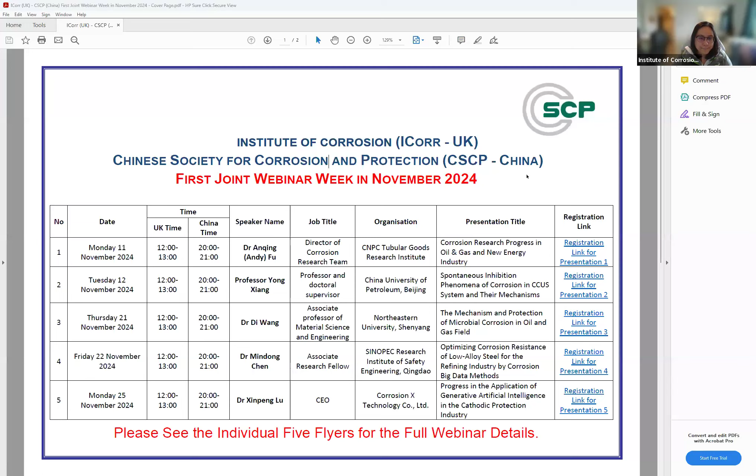Dear President Stephen, Dr. Gao, ladies and gentlemen, good afternoon and good evening. I'm Xiaogang Li from University of Science and Technology Beijing. Thank you for your attention at this meeting.

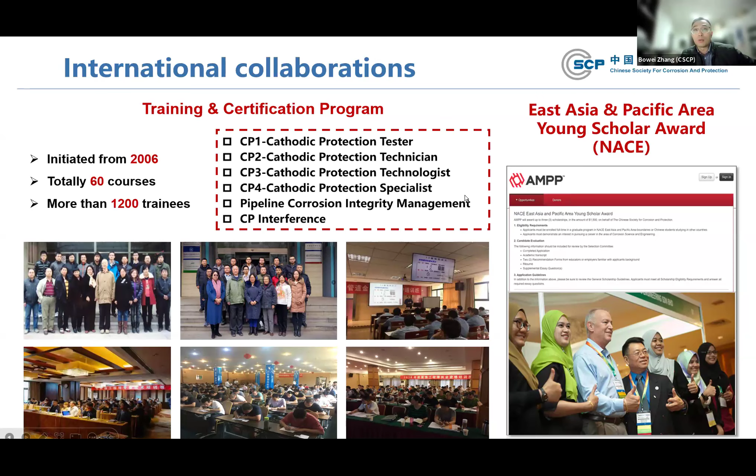During the past 3 consecutive years, we have held 3 different international conferences: the International Congress on Materials Degradation and Protection in 2022, the 19th Asian Pacific Corrosion Control Conference in 2023, and the 22nd International Corrosion Congress in 2024. During the 22nd ICC, there were more than 1,020 participants from over 40 countries, and it was really a great success. It was just held last month in Xi'an, China.

Okay, that's for the brief introduction of CSCP. For more information about us, you can refer to the official website or the official WeChat account. Thank you for your attention.

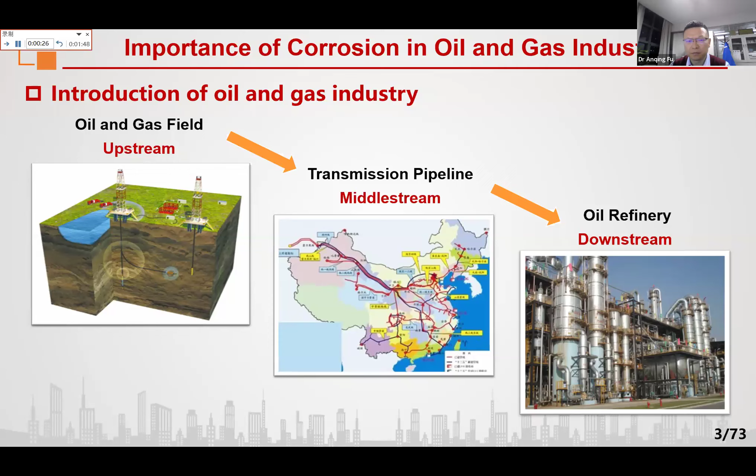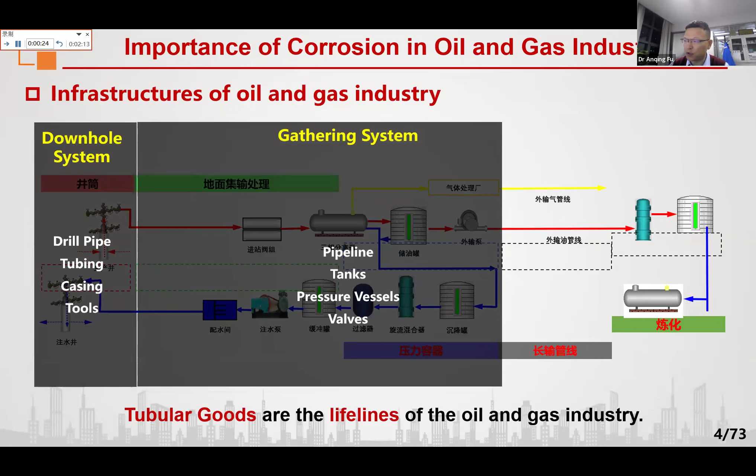Tubular goods are the lifelines of the oil and gas industry. The tubular goods include the drill pipe, tubing, casing, tools, and in the downhole system, as well as in the gathering system, we can see the pipeline tanks, pressure vessels, and valves. Also in the long transmission pipeline system, as well as the oil refinery system.

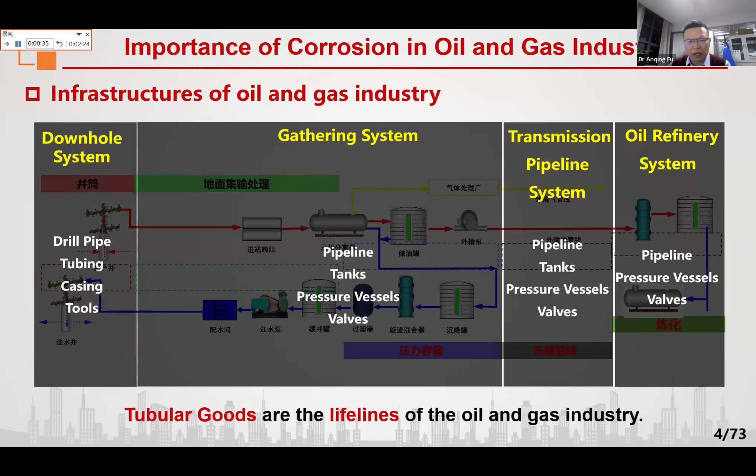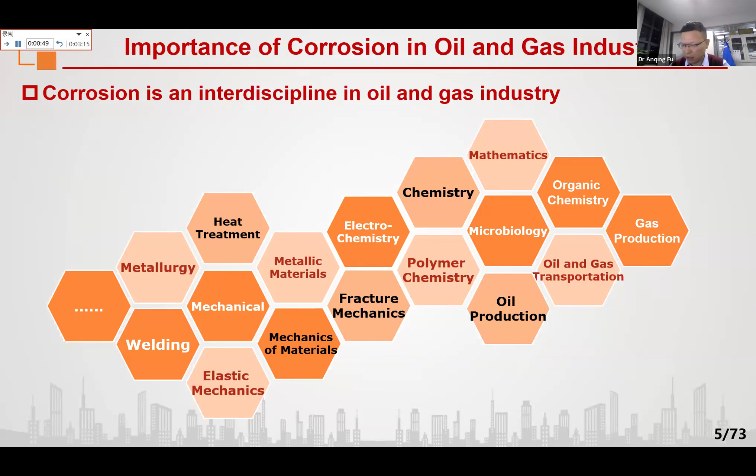Here we can see corrosion is an interdiscipline in the oil and gas industry. Besides the core majors like electrochemistry and material science or metallic material science, many other areas are also involved in this diagram I show. For example, for AI and CFD, we need to include computer science. Also, in the oil and gas field, we need to learn more about the oil and gas production process. For SCC, we need to involve mechanics and fracture and so on. All the corrosion forms shown in this slide, we can find in our oil and gas field. I will show you later.

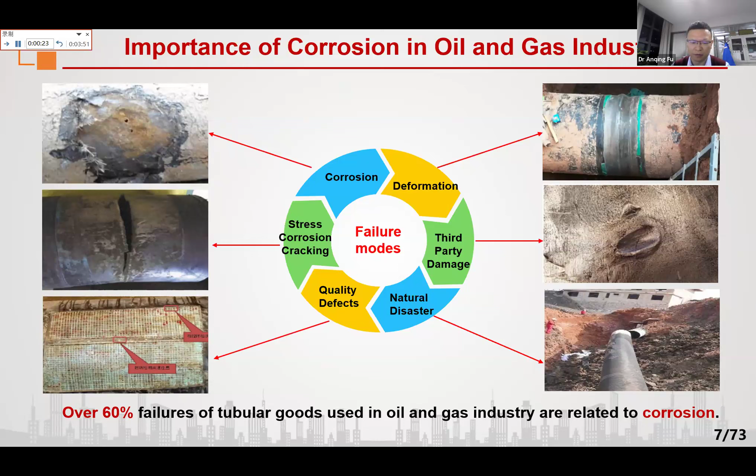It is reported that over 60% of failures of tubular goods or OCTG used in the oil and gas industry are related to corrosion. Especially for gathering pipelines in China, it is reported that almost over 90% of failures are related to corrosion. Cost of corrosion is more than the loss of oil and gas. I think we should be concerned more about the safety and environmental issues.

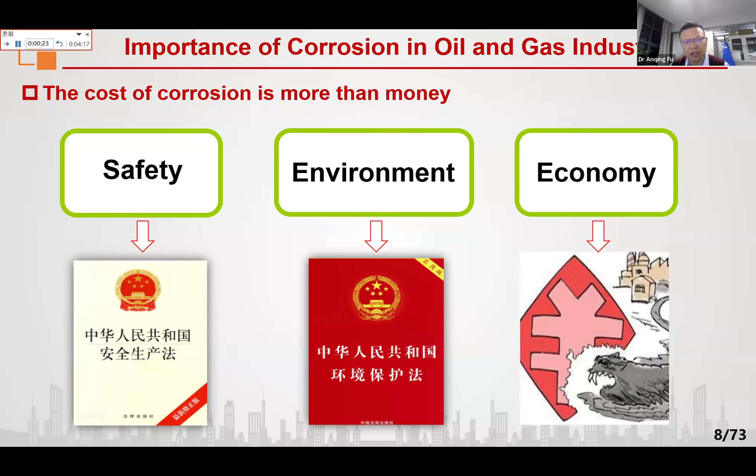So here I just summarize 3 things related to corrosion in the oil and gas industry. The first priority should be safety and environment, and the last one is the economy.

Okay, let's go to the second section, the corrosion case studies in the conventional oil and gas field. Here I just want to differentiate from the following shale gas, so here I use the term conventional oil and gas.

This slide shows the typical corrosion failures of the downhole tubing and gathering pipeline. As I mentioned earlier, various corrosion types can be found in the oil and gas field. Here I just want to emphasize that all the pictures shown in this slide are collected from the field or our project, instead of online or from literature.

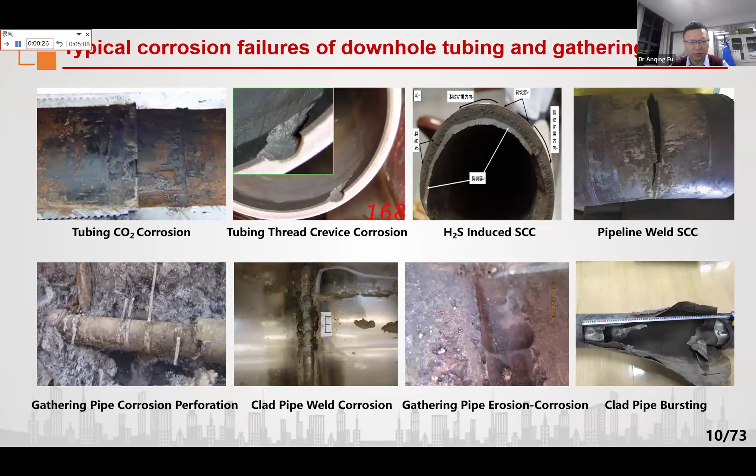The first case is for the downhole system.

Acid fracturing is widely used for enhanced oil and gas recovery, but it can cause severe corrosion to tubing as well as casing. Since the acid solution is very acidic, it causes very severe corrosion within several hours or several days. So several research efforts are underway in our team: new tubing material selection, acid inhibitor research and development, as well as corrosion evaluation facility development.

The last point is a standard for conducting the test. Since this test is very unique, we need to develop a new standard or method to do this kind of test.

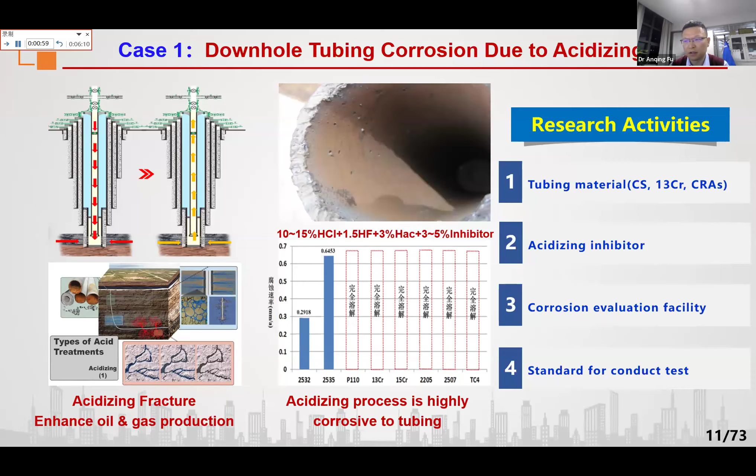The second case is the most concerning failure in the oil and gas field, especially in high sulfur oil and gas fields. In China, especially in the Sichuan basin, we have a lot of gas fields that contain very high sulfur, so SCC is absolutely the first priority we need to consider.

In the future, we need to develop anti-SCC materials and optimize the OCTG manufacturing process, as well as develop some new chemicals to reduce SCC.

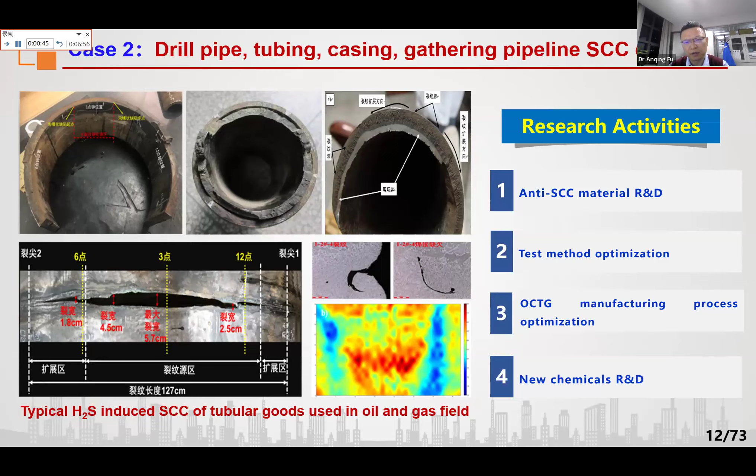The third case is downhole tubing SCC due to packer fluid. This is another type of SCC.

No matter in China, European countries, or North America, we usually use three types of packer fluid. The first one is halide salt. The second one is formate. The last one, especially used in China, is phosphate.

We already found that a lot of 13-chromium martensitic stainless steel tubing has experienced severe SCC in phosphate packer fluid. We have found many cases in the field, and we've also done a lot of tests in our lab. We indeed found SCC occurred for the 13-chromium stainless steel.

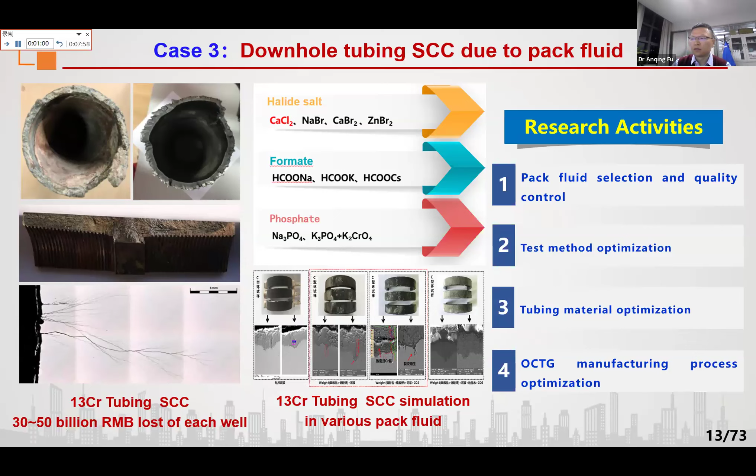The fourth case is tubing and gathering pipeline erosion corrosion. No matter in the downhole system or the gathering system, erosion corrosion is always a big issue. Here I give the most commonly used methods in our oil and gas industry to conduct erosion corrosion tests. The first one is rotating disc electrode.

For this one, we cannot apply high temperature or high pressure. It's mainly good for theoretical research. The second one is impinging jet - the same thing, it cannot apply pressure and temperature. The third one is the fluid loop.

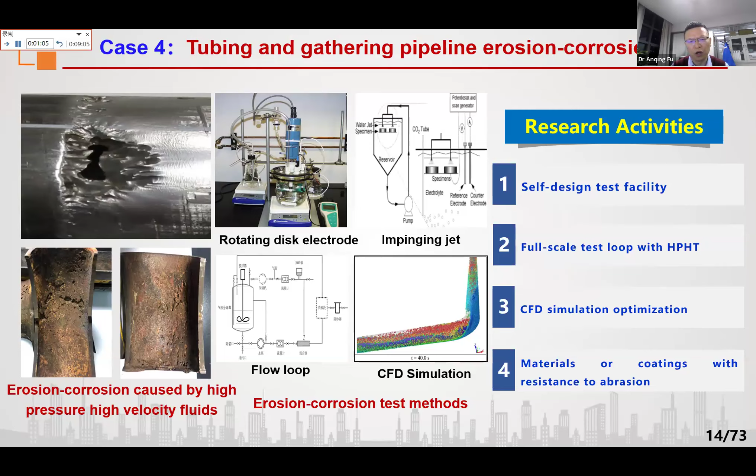Somehow the fluid loop can apply some pressure and temperature. The last one is CFD simulation. So currently, lab testing with high flow rate under high temperature and high pressure conditions is still a big issue. There is no commercial or self-designed facility to do this kind of test right now.

The last case, which personally I think is the most common gathering pipeline corrosion, is defined as under deposit corrosion, short for UDC. Usually the localized corrosion occurs at the 4 to 8 o'clock position, especially at the 6 o'clock location.

Inhibitors and coatings, non-metallic composites, and clad pipes or lined pipes are widely used to reduce this kind of corrosion. Actually in China, there are many non-metallic composite pipes used in the oil and gas gathering pipeline system, especially in Changqing oil field, Daqing oil field, and many other oil fields.

Since this kind of material has no corrosion, there is still some degradation, especially when temperature is over 80 degrees C, which can cause a big issue.

Another disadvantage of the non-metallic pipe is that the connection joint is a big issue. Since we usually use many kinds of joints, there is a lot of leakage due to the material going inside.

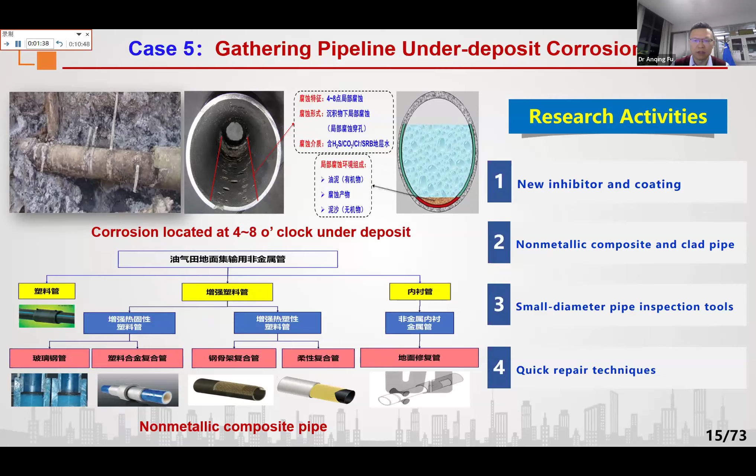So let's move to the third section, the corrosion case studies in the shale gas field. Here I mainly talk about microbiologically influenced corrosion, that means MIC.

Before we go to the details of MIC in shale gas oil field, gas field, I want to briefly introduce shale gas production. Hydraulic fracturing is frequently used in shale gas. Usually we use 10,000 tons of fracture fluid and 1,000 tons of sand to do the hydraulic fracturing, and this is only for one single well. You can imagine for many wells, we need a lot of fluid with sand.

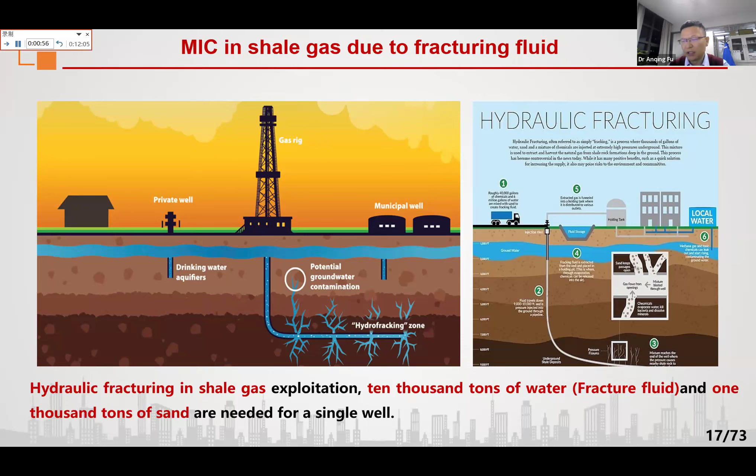Usually we repeatedly use one batch of the fluid. Due to this repeated use, a lot of bacteria can be generated. The first typical one is SRB, sulfate reducing bacteria, and also TGB, FB, and many others. But I think the main one contributing to the corrosion is the SRB.

The MIC frequently occurs no matter in the gathering system or in the downhole system. Here you can see the picture very clearly shows how the corrosion occurred in those two systems. The corrosion rate is prohibitively high no matter in these two systems.

Here is an example: a 5 millimeter wall thick tubing was perforated within 58 days, just less than 2 months. There was a lot of perforation, and the corrosion rate is very high. Actually, we found this not just in a single well, but many cases in CNPC and Sinopec shale gas wells.

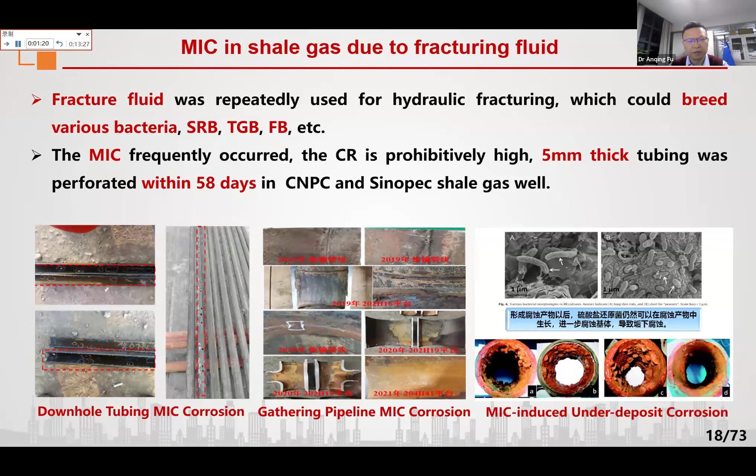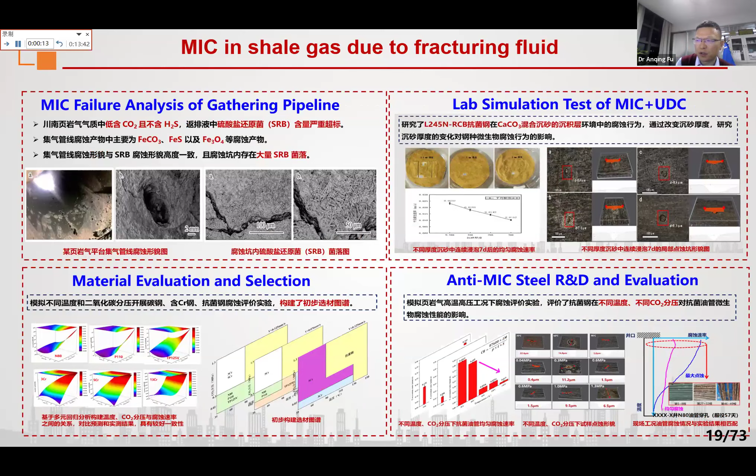Our team has done a lot of failure analysis and lab simulation of MIC, material evaluation and selection, as well as anti-MIC steel development. Currently our TGRI has set up an MIC lab, which is capable of conducting SRB, FB, TGB culture and isolation and analysis, as well as MIC tests under various conditions.

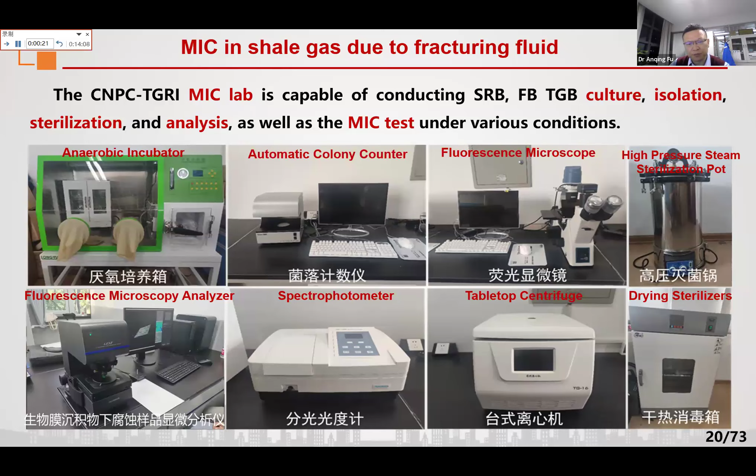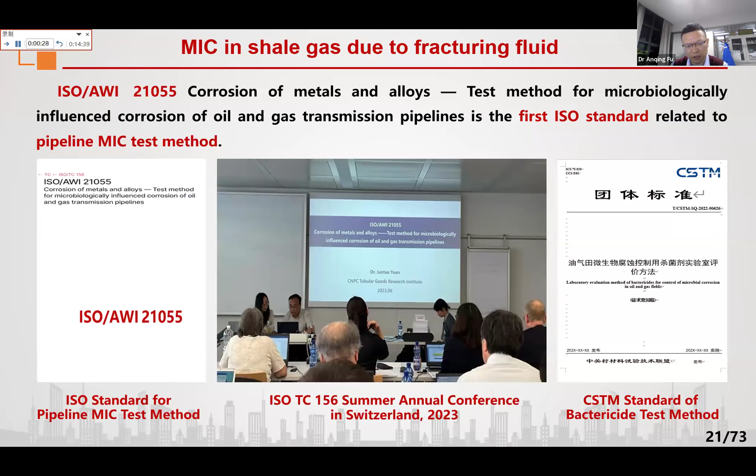Based on almost 5 years of research, our team proposed an ISO standard, the test method for MIC of oil and gas transmission pipelines. This is the first ISO standard related to the pipeline MIC test method. Besides this ISO standard, we also developed several MIC related standards, for example the test method as well as the anti-MIC materials.

The next part is the corrosion in CCUS or CCS CO2 oil displacement. Why do we care about CCUS in the oil and gas industry? Since it is a win-win strategy, the CO2 is reduced and the oil is enhanced. However, the CO2 has a side effect: corrosion. In our CNPC, corrosion is considered one of the 10 key techniques of CCUS EOR.

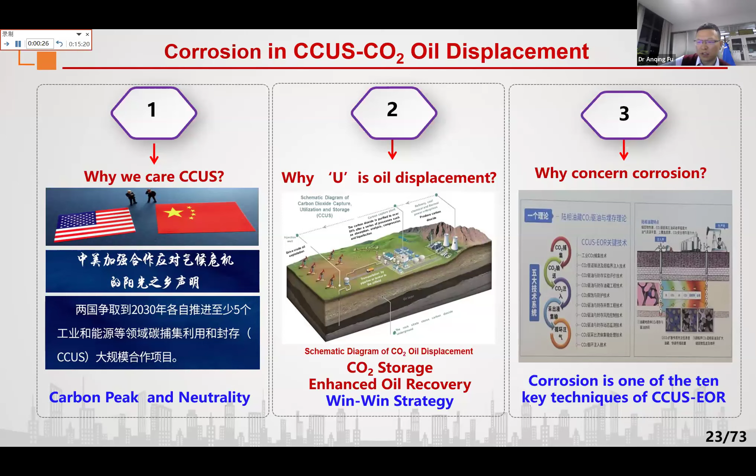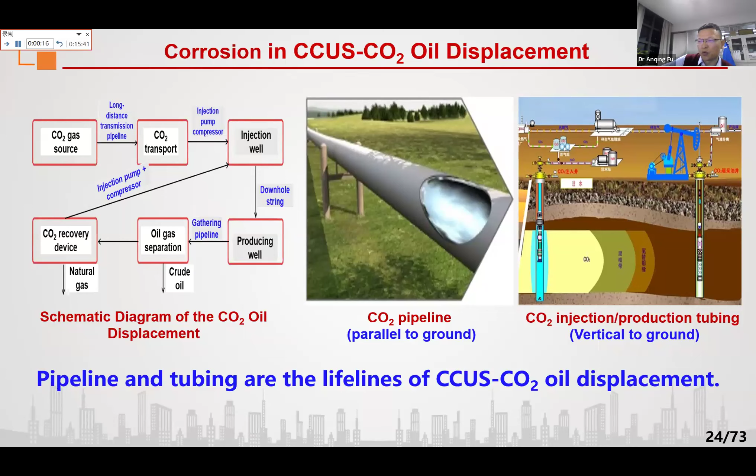No matter for CO2 injection and production or for transportation, we need tubular goods - that means pipelines, tubings, casings - which are the lifelines for the CCUS CO2 oil displacement. Here I just briefly compare the difference between conventional CO2 corrosion and CCUS CO2 corrosion.

The first one is most CO2 injection is in a supercritical state, which can induce tubing and casing corrosion. The second one is the injected CO2 contains acidic impurities, which can induce ICC, since this kind of gas source is mainly from coal-fired power plants. The third one is the supercritical CO2 injection leads to low temperature.

Actually, this kind of scenario we can find in our lab. If you pressurize the CO2 in our autoclave, you can see there is some ice. The temperature quickly goes down due to the CO2 injection. The last one is supercritical CO2 induced packer rubber failure.

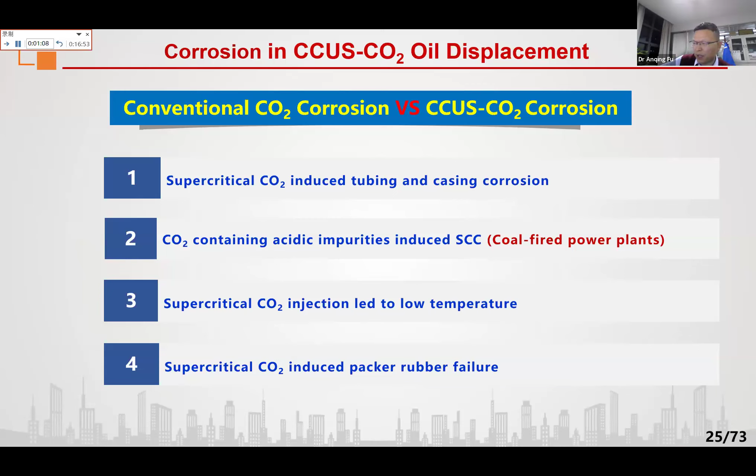Based on our research, supercritical CO2 with multi impurities can cause corrosion - that's the first one. The second one is SCC, as I mentioned earlier, stress corrosion cracking and scaling, since the supercritical CO2 with a lot of ions can lead to scaling. The third one is packer rubber sealing failure, and the last one is low temperature fracture.

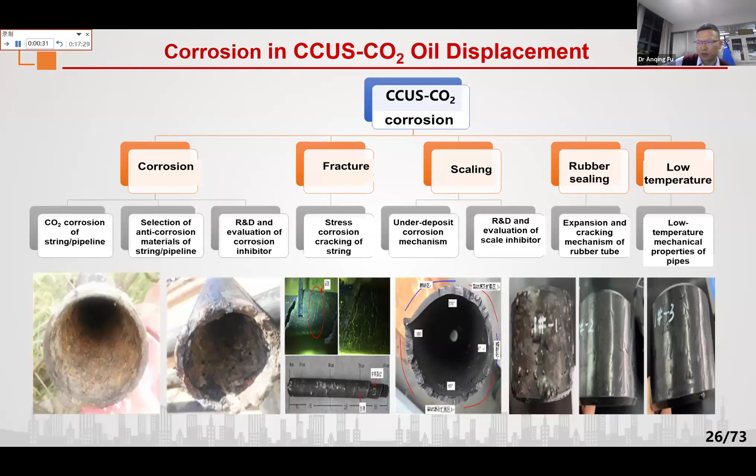In the following slides, I will show you the research results from our lab. The first one is the influence of CO2 pressure on the corrosion rate. The corrosion rate is substantially increased when the CO2 reaches the supercritical state.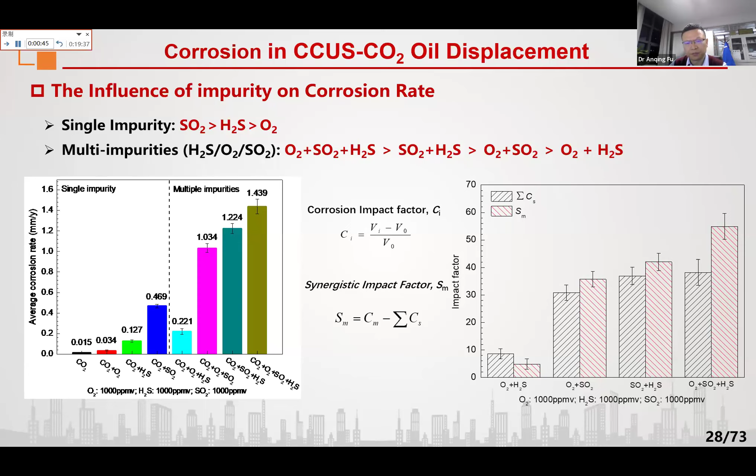Since we all know CO2 has no relation to SCC, stress corrosion cracking, there was few researches on SCC in lab research. However, acidic impurities, as I mentioned earlier, contained in the CO2 injection system, which can induce SCC failures. That's not only in one oil field, but in several oil fields, in CNPC and Sinopec, so it's not an individual case. It's very common, and we have done a lot of failure analysis for this kind of oil field. Therefore, more attention needs to be paid in the future for this kind of research.

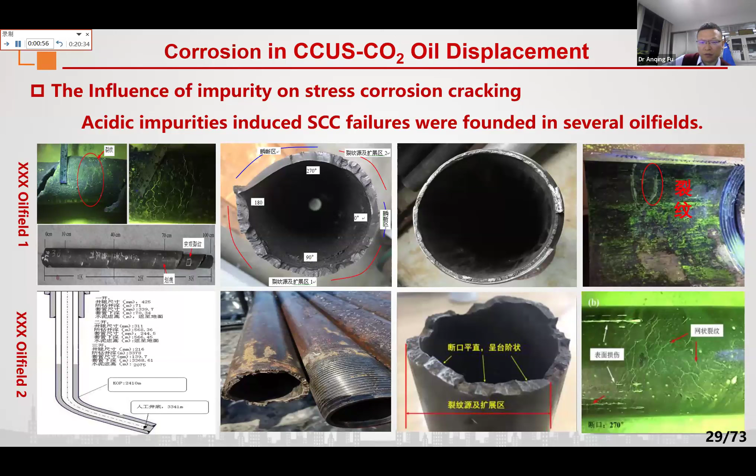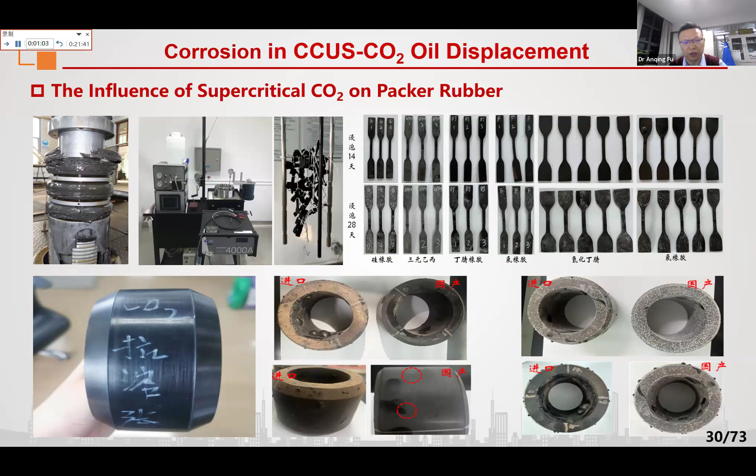Now we have done a lot of tests for this kind of material. Right now in China, some factories have developed a high performance rubber for this kind of situation, especially for the supercritical CO2 condition.

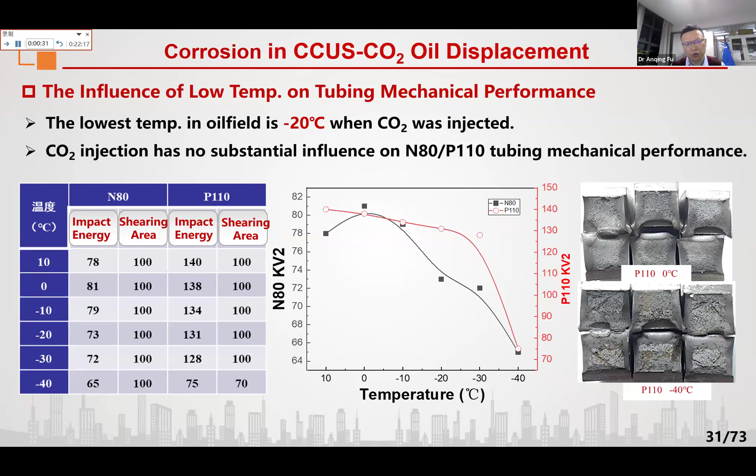The last one is the influence of low temperature on the tubing mechanical performance. Why do we concern ourselves with the low temperature situation? Since the injection of CO2 will lead to the temperature dropping to as low as -20 degrees C. Based on our research, CO2 injection indeed led to a decrease of the impact energy of the tubing. However, there was no substantial influence, so right now we don't concern too much about this kind of scenario.

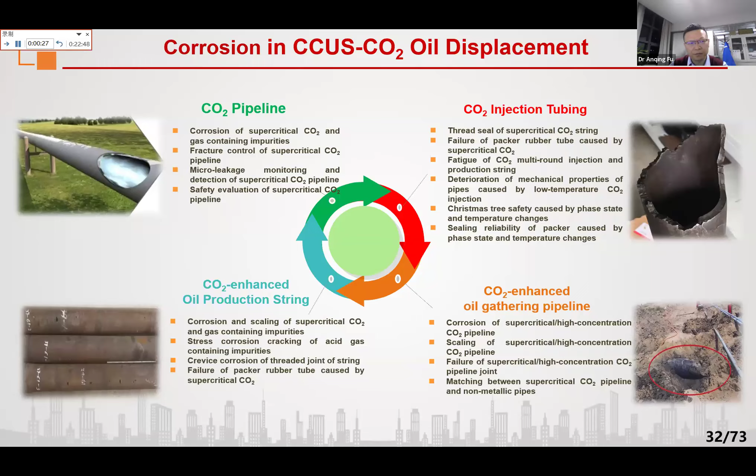Okay, the next part is hydrogen, which is another hot topic besides CCUS CO2 corrosion in China. As we know, hydrogen is considered an extremely clean energy. Many infrastructures, such as pipeline, tubing for underground hydrogen storage, liquefied hydrogen vessel, and solid hydrogen storage material, are potentially degraded or damaged by gaseous hydrogen.

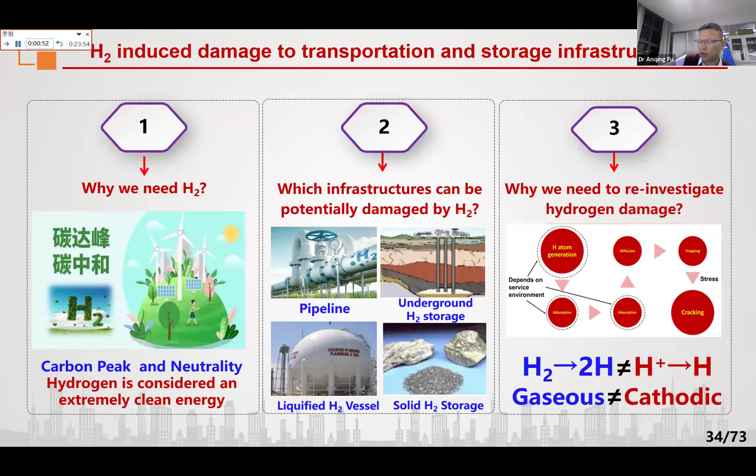Actually, there are a huge amount of publications on hydrogen-induced SCC, no matter in Chinese version or English version, we can find a huge amount of publications. However, those researches are based on cathodic or ionic hydrogen, which is totally a different story for gaseous hydrogen. My PhD supervisor, Dr. Frank Cheng from University of Calgary, has summarized the differences between gaseous hydrogen and cathodic hydrogen. I will not touch much detail due to time limitation.

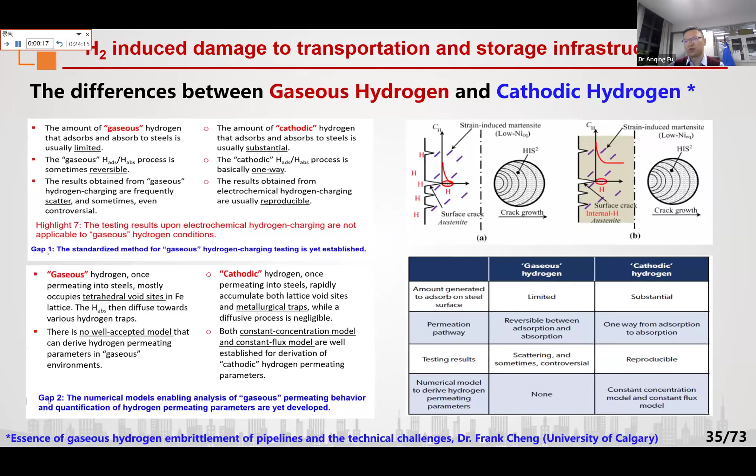In these slides, I compared the cathodic hydrogen test facilities and the gaseous hydrogen test facilities. You can see usually there is a very classic test method, the double D cell, to do the cathodic hydrogen damage test, or the SSRT with hydrogen charging, which is cathodic hydrogen charging.

Currently in our CNPC TGRI lab, we have already developed three facilities. The first one is high temperature, high pressure gaseous hydrogen SSRT test. The second one is the high temperature, high pressure gaseous hydrogen permeation test. And the last one is doing the hydrogen content test using HTDS, that is, the high definition thermal desorption spectrum method.

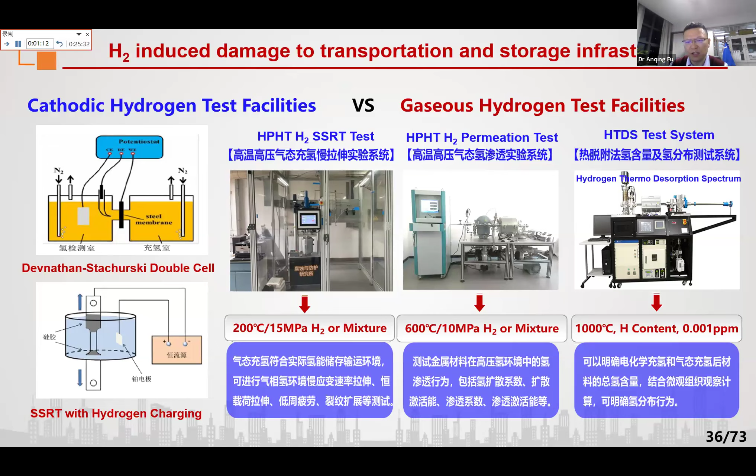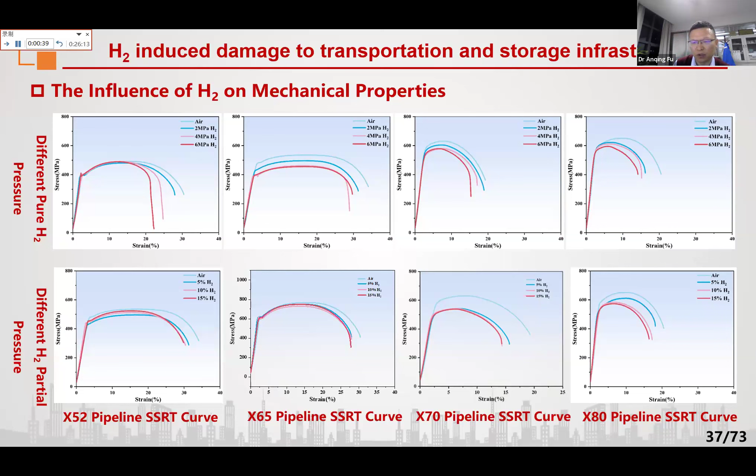We can see in this slide that gaseous hydrogen indeed has an influence on the mechanical properties of pipeline steel, no matter for the low-grade pipeline, X52, or the high-grade pipeline steel, X80. Actually, X80 was commercially used in China for a very important long transmission pipeline project, but as I know, this kind of high-grade pipeline was not commercially used in other countries.

We have also done the test for gaseous hydrogen permeation under high temperature, high pressure conditions, to find how much hydrogen went into the pipeline steel after the test in the gaseous hydrogen environment, which was quantified by the HTDS method. Actually, these three facilities are not only suitable for pipeline steel or tubing, but also for aluminum, titanium, stainless steels, as well as CRAs.

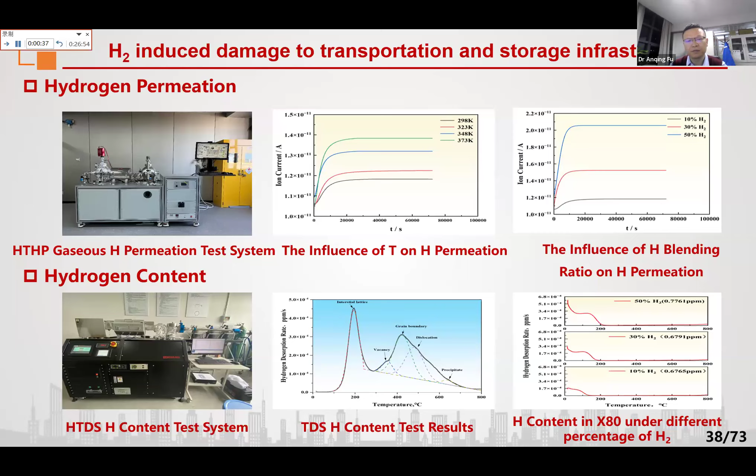Okay, the 6th section is the 3 anti-corrosion products developed by our CNPC TGRI corrosion research team. The first one is the inhibitors.

Before we go to the inhibitors, I want to share some problems we encountered in the oil and gas field. Inhibitors are the most commonly used corrosion protection technique in the oil and gas industry. Unlike theoretical research in our lab, the physical properties are as important as the inhibition efficiency and mechanism. Here are some typical examples of inhibitor physical property problems encountered in the oil field: foaming, stratification, poor compatibility with other additives such as MDEA used for oil and gas treatment solutions, and poor solubility in the water or oil phase. The last one is inhibitor type misuse.

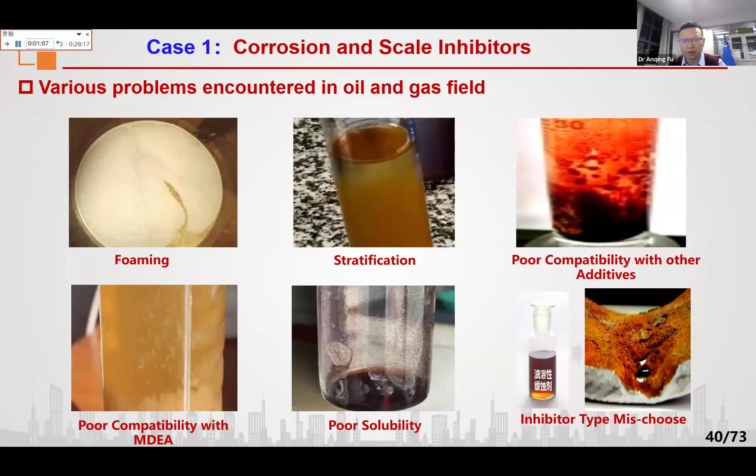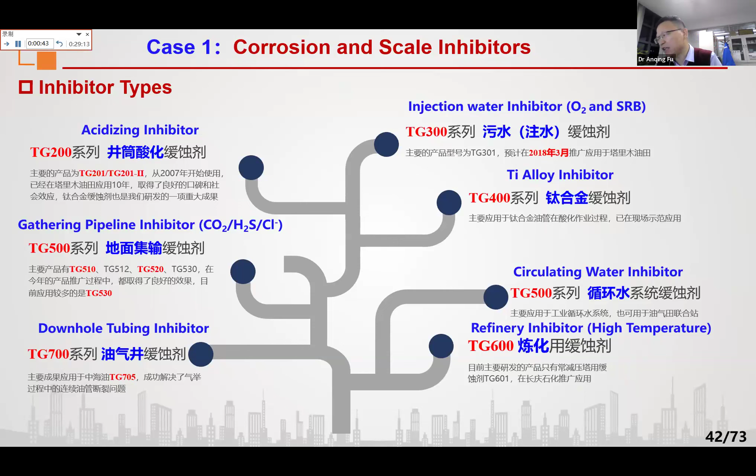Our team has developed various types of inhibitors, from downhole acidizing inhibitors to gathering pipeline inhibitors for CO2 and H2S. We also developed special inhibitors for oxygen, since we inject a lot of gas and some of it involves oxygen. Additionally, we developed injection water inhibitors, inhibitors for special alloys like titanium and duplex stainless steel, and high temperature inhibitors for refineries.

The inhibitors have been applied in over 400 oil and gas wells in Changqing, Tarim, and Qinghai oil fields, and over 5,000 kilometers of gathering pipelines. Corrosion in the downhole and ground gathering system was greatly reduced by the inhibitors we developed, especially in the Tarim oil field, which is the third biggest oil field in China.

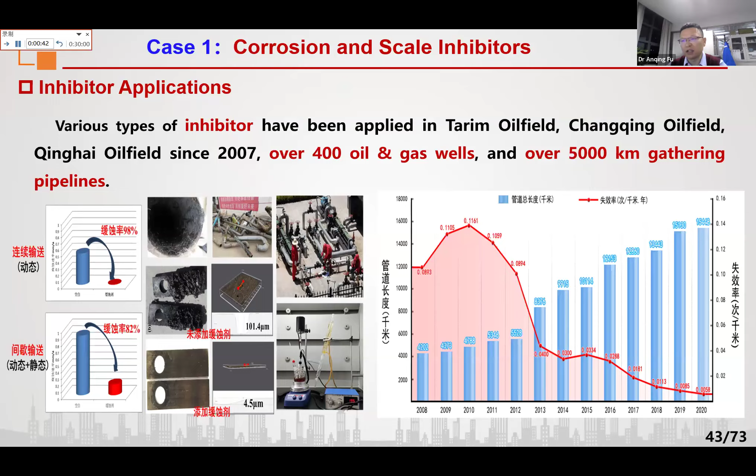Another technique is coating, especially organic epoxy coating, which is a popular anti-corrosion technology used in oil and gas fields in China. There are already many coatings applied in oil and gas fields. How to develop an overall high quality coating, I think, is still a big issue.

So here we developed this coating with two key factors. The first is room temperature curing, meaning energy saving—we don't need electrical heat to reach high temperature, just room temperature or a little higher, so there's a lot of energy saving. It's a kind of low carbon coating.

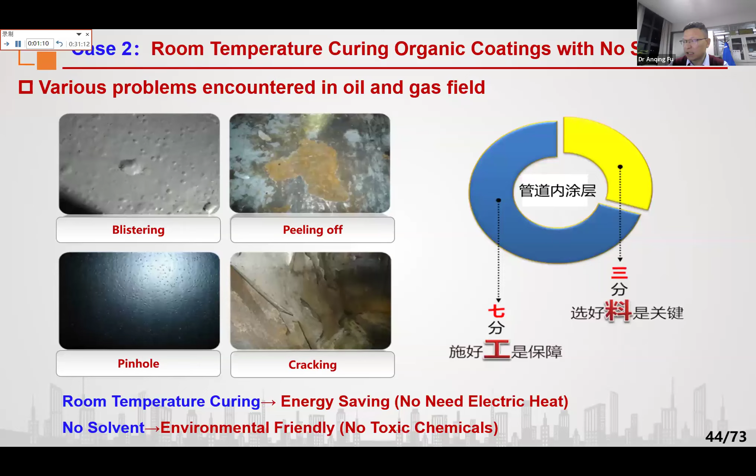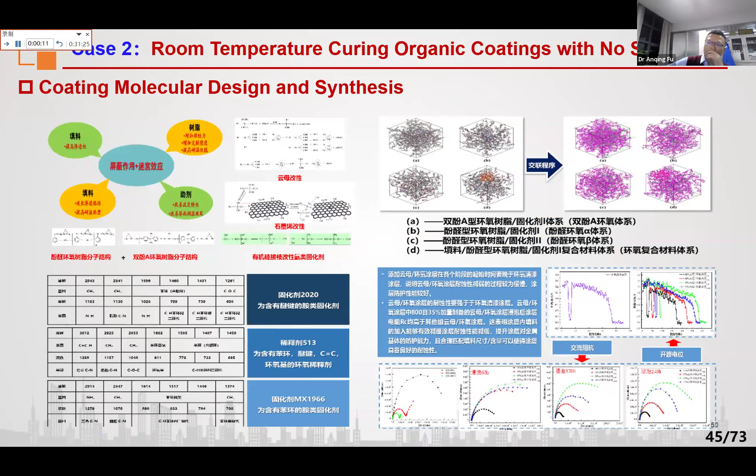The coating we developed can endure 35 megapascal CO2 and 2 megapascal H2S at temperatures as high as 130 degrees C.

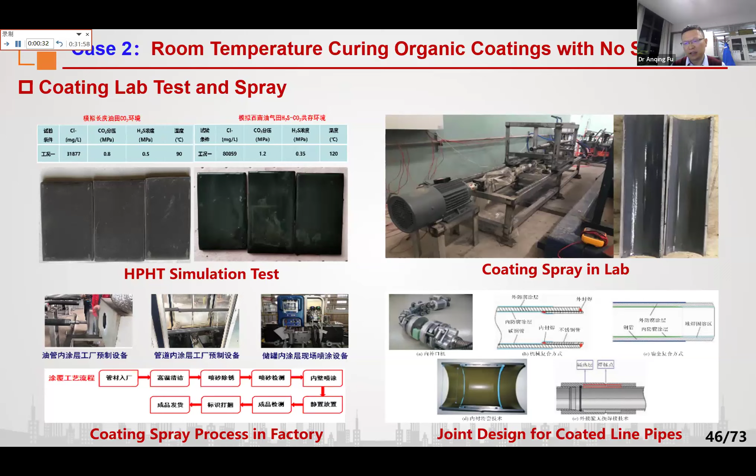Besides the paint itself, the spray process or technology, as well as the joint connection, are very important for coating application in the field, whether for tubing, casing, pipeline, tanks, or vessels. By now our team has already developed coatings for drilling pipes, downhole tubing and casing, gathering pipelines, as well as tanks and vessels. Some of these have undergone pilot tests in Changqing and Shengli oil fields.

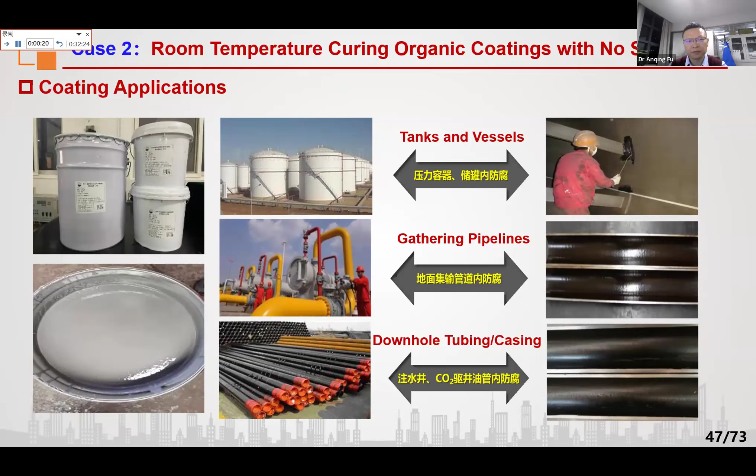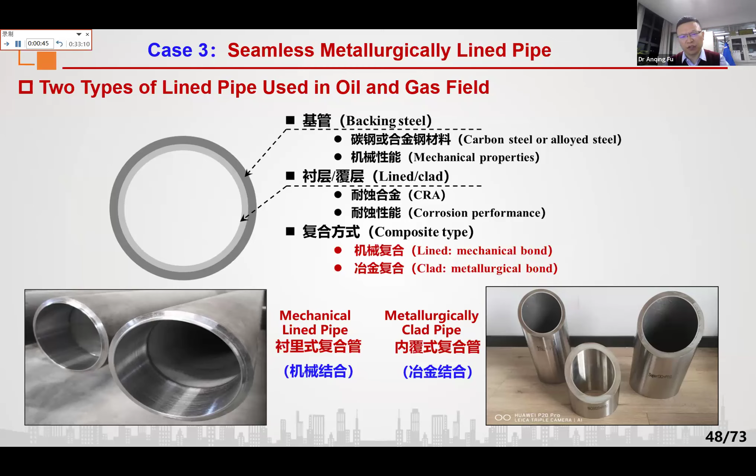The last one is the lined pipe or clad pipe, another anti-corrosion technology used in oil and gas fields in China. Usually there are two types of lined pipe: the first is mechanical lined pipe, and the second is metallurgical lined or clad pipe. For the second type, there is more bonding strength between the two layers. The outer layer is usually low carbon steel to provide strength, and the liner is usually stainless steel to provide corrosion resistance.

However, we have found a lot of mechanical lined pipe failure cases, both onshore and offshore. All the failures shown here we collected from oil and gas fields. The first is liner blister—since there is no bonding strength, pressure fabrication sometimes leads to liner blister. The second is liner collapse. The third is weld joint cracking. The last is weld joint corrosion.

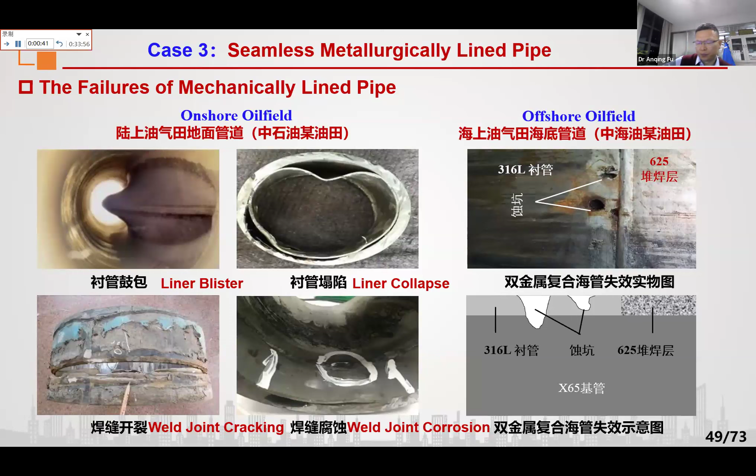Actually, we have developed various types of clad pipe, no matter for carbon steel, for tubing and casing, or for pipeline. For the liner, we apply various types of stainless steel, for example martensitic stainless steel, austenitic stainless steel, or duplex stainless steel, as well as CRAs. And we can produce many diameters from very small to very big.

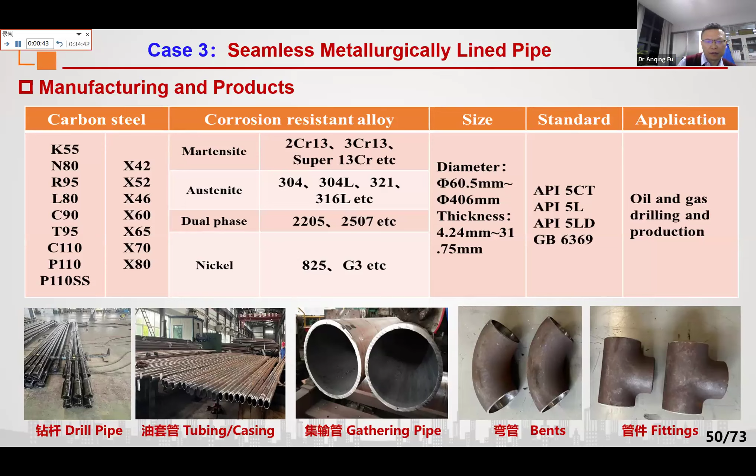Here shows the drill pipe, tubing, casing, gathering pipe, and bends and fittings. Since it's a very complex pipe, especially since there is a layer between two pipes, we need to do fundamental research mainly on the mechanicals, corrosion, and microstructure.

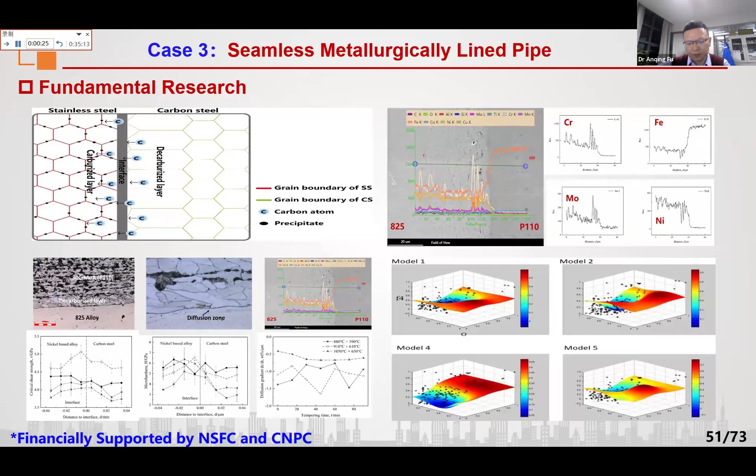We also developed the standard for mechanical lined pipe. We have already developed two ISO standards for the mechanical lined pipe.

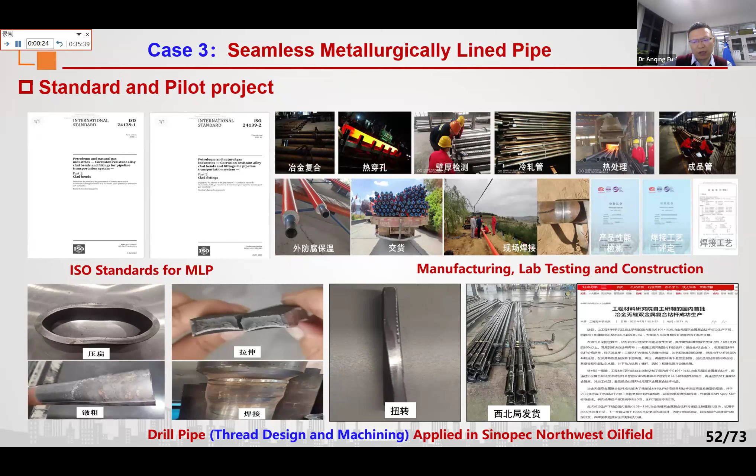We also have some pilot projects, no matter for pipeline. The first one is the drill pipe, which we have applied in the Sinopec Northwest field. The second one is tubing and casing, applied in the Changqing oil field. And the last one is the gathering pipeline, which is already applied in the Changqing oil field as well.

So the seventh part is the challenges for corrosion and protection in the oil and gas industry.

The first challenge is that money is indeed a big problem for the oil and gas industry when we consider selecting material to protect infrastructure from corrosion. But in the aerospace or nuclear industry, if there is a corrosion problem, sometimes economical concern is not an issue since money is not a big problem. So for the oil and gas industry, our first priority is the economical concern, and secondly we have to provide material with very high corrosion resistance.

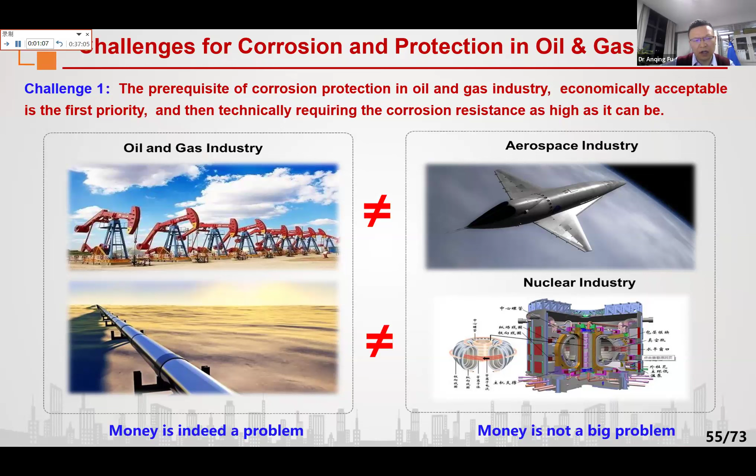Actually, it is very hard. The second challenge is the balance between cost and performance in terms of corrosion resistance. Carbon steel price is pretty low, but it always experiences corrosion in the oil and gas field, especially as the corrosion environment becomes more and more harsh. If we apply stainless steel, it can provide good corrosion resistance, but the price is usually very high. So we need to balance cost and performance. That's the second challenge we need to consider.

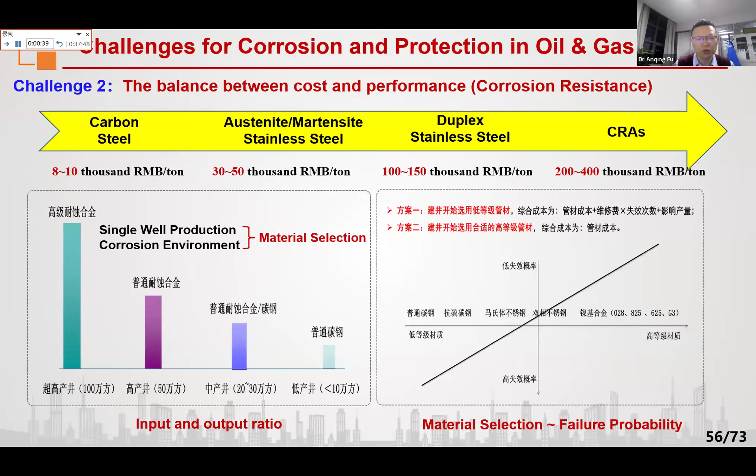The third challenge is the difference between lab tests and field application. Sometimes we find a lot of field corrosion perforation or very severe localized corrosion in the field, but if we do a lab simulation test, usually we cannot find the corrosion. The corrosion is very light, so sometimes we cannot find the localized corrosion. No matter for corrosion or SCC, it's the same story.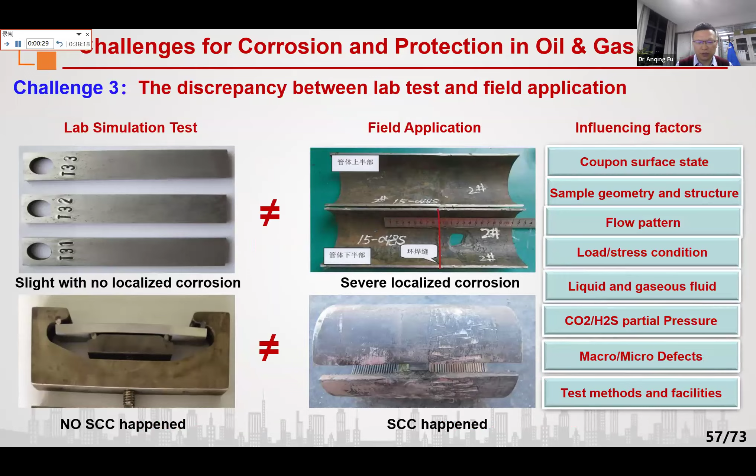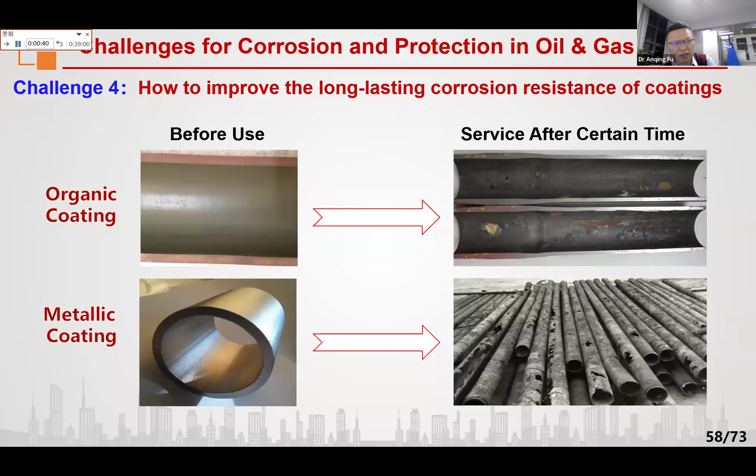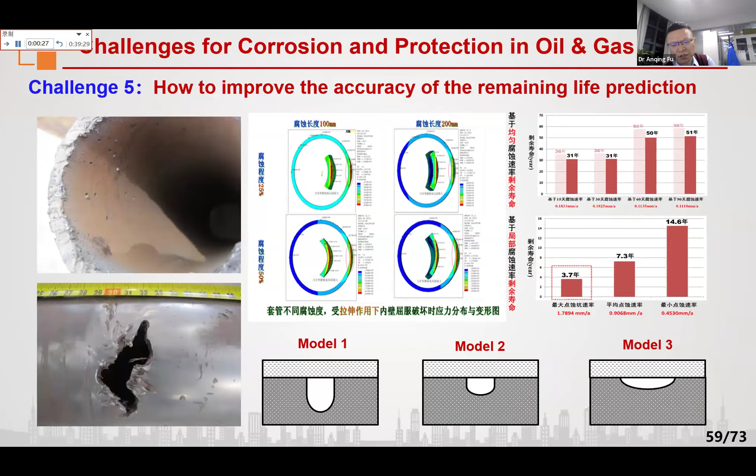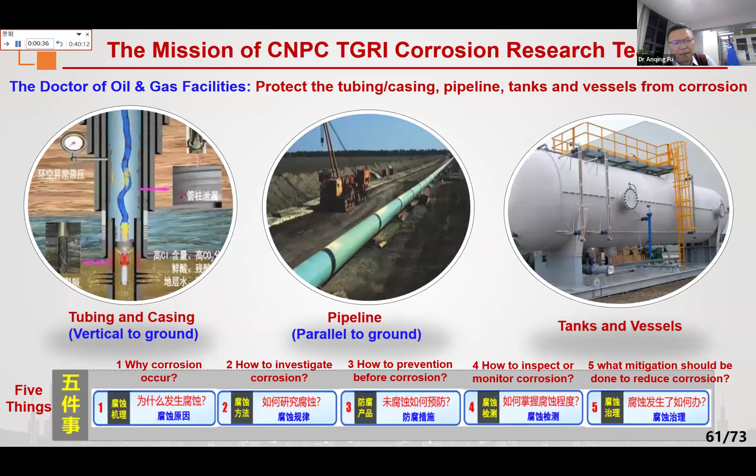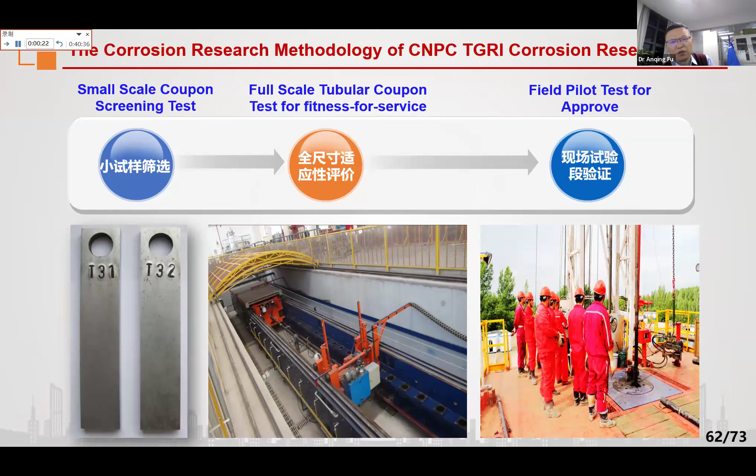This is our team. Currently, we have 37 employees in our team, including 17 PhDs and 9 research teams.

For the oil and gas field corrosion team, the pipeline corrosion team, refinery corrosion team, and the MSC corrosion team, the chemicals R&D team, coating R&D team, hydrogen material team, and CCUS CO2 corrosion team. The last one is the technician team. They are exclusively doing the tests for all of these.

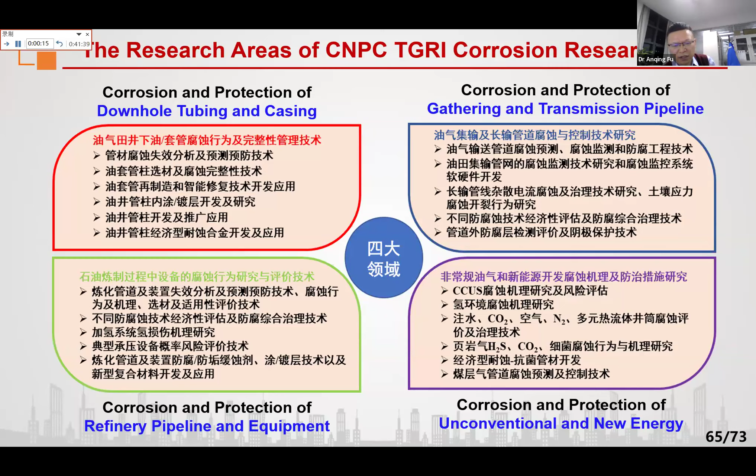The research areas include downhole tubing and casing, gathering and transmission pipelines, as well as refinery pipeline equipment. The last one is new areas, as mentioned earlier: new unconventional and new energy materials.

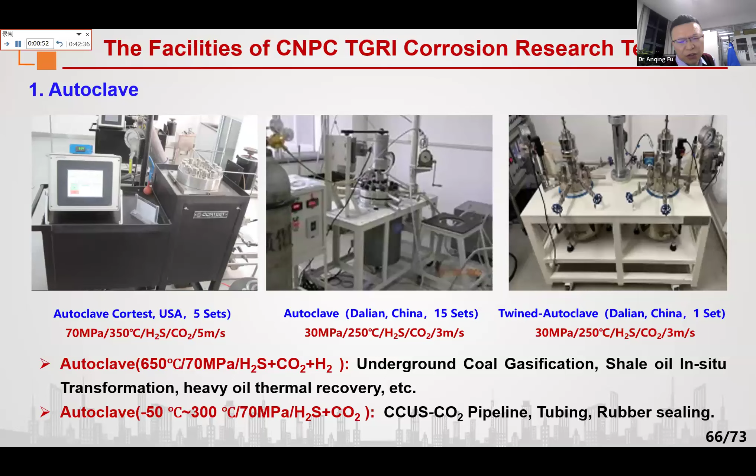Some facilities are essential weapons for our current research. The first step is autoclaves. We need all kinds of autoclaves to do H2S CO2 corrosion tests. Recently we purchased two kinds of autoclave from Cortest, USA. The first one mainly does very high temperature, as high as 650 degrees C, and pressure up to 70 megapascal, which can input fluids including H2S, CO2, as well as hydrogen. The second one can do temperatures as low as minus 50 degrees C, mainly for the CCUS CO2 corrosion test.

The second part is the electrochemistry workstation: the traditional electrochemistry workstation, the micro-scanning system, and also the high temperature, high pressure electrochemistry workstation.

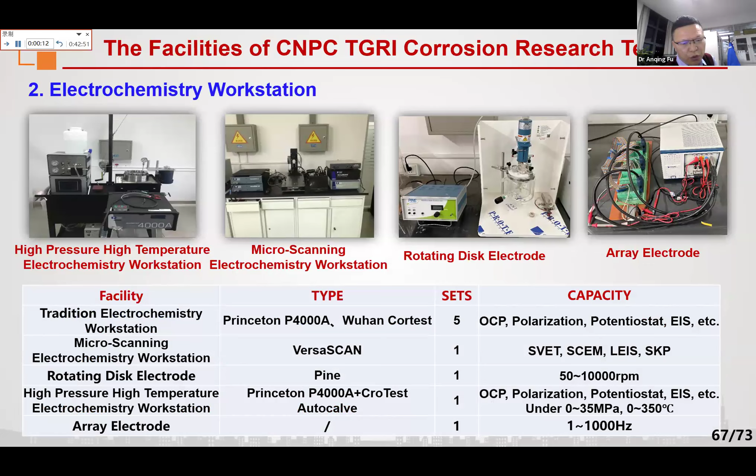The third one is the SCC test facility. We have almost all kinds of SCC facilities for room temperature and atmospheric pressure tests, mainly following the standard from NACE. The second is a high temperature and high pressure test. The last is self-designed facilities mainly for full-scale tubing and pipe tests.

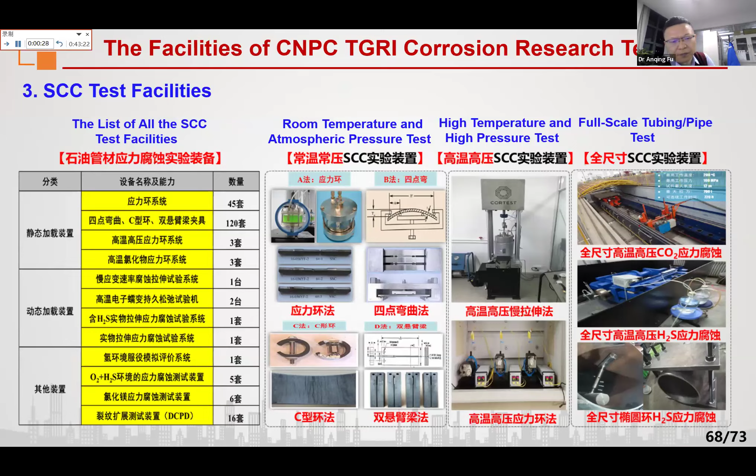Here is a picture showing what the full-scale tubing SCC facility looks like. We have developed this method according to the AMPP standard, which is similar to the NACE standard.

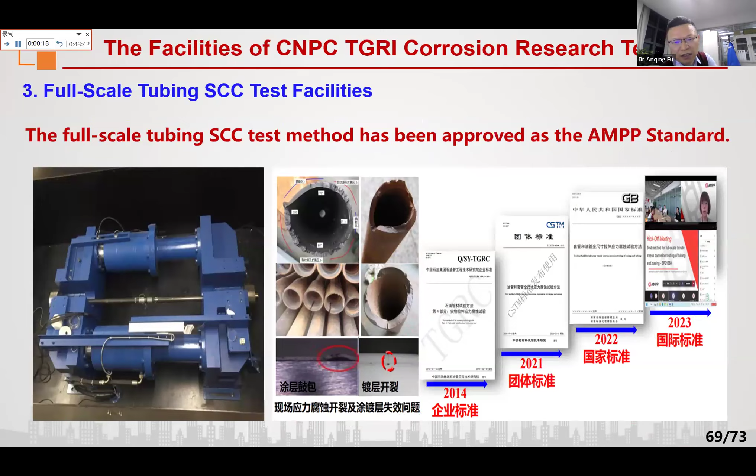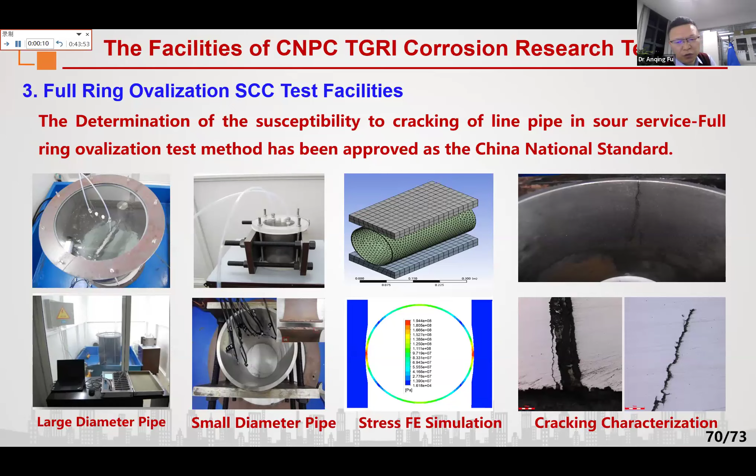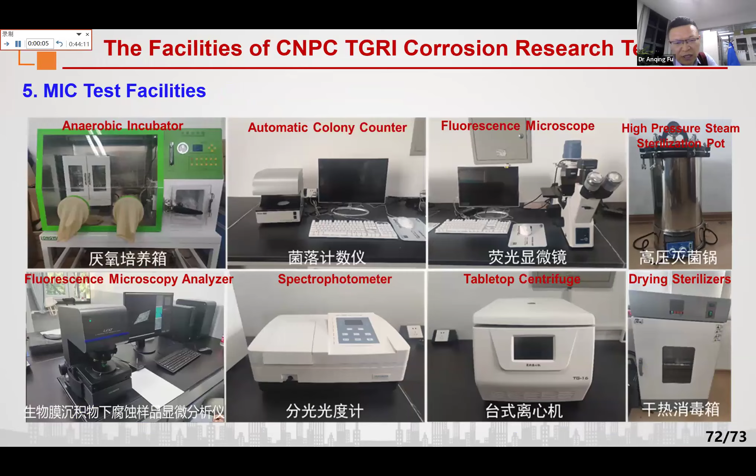Okay, thank you for your attention. If you have any questions or concerns, please feel free to ask me or email me.